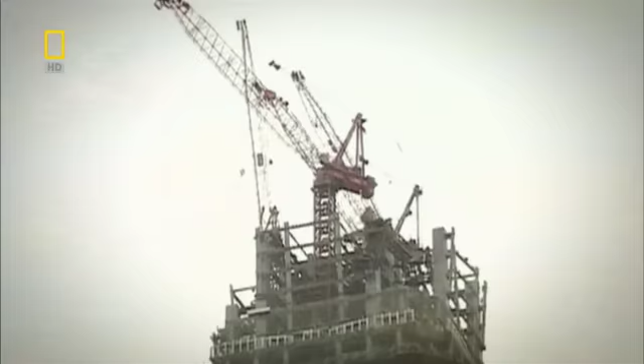This is Taipei 101, Taiwan's record-breaking skyscraper. Incredibly, it's a third taller than the Empire State Building, and cost $1.75 billion to build. But Taipei 101 not only stands in a typhoon hotspot, but right beside an active earthquake fault line. It couldn't exist without the surprising engineering connections hidden deep within its design.

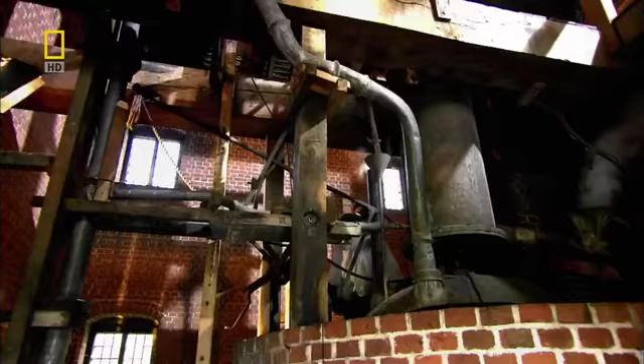A racing yacht — I can't believe the speed of this thing. A birdcage — that didn't last long at all. A steam pump. A safety belt. And a sports car.

So, what's all that got to do with one of the world's tallest buildings? We're about to find out.

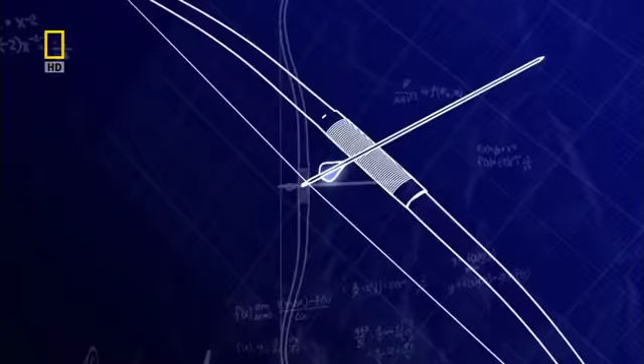I'm on a journey to explore some of the inspirations behind Taiwan's extraordinary skyscraper. In 2004, Taipei 101 topped the record books, reaching 509 meters. Everything to do with Taipei 101 is big — very, very big, whichever way you look at it.

But what made modern skyscrapers like Taipei 101 possible? Bizarrely, inspiration is thought to have come from a birdcage. Less than five generations ago, skyscrapers like these weren't possible. Engineers feared really tall wood and masonry structures would collapse under their own weight. So the question is, who thought of making buildings with metal frames, and why?

Rewind to Chicago, 1871. The city is on fire. The inferno rages for 36 hours, killing over 300 people and destroying 17,500 buildings. The ruins reveal the cause: three months of drought turned the timber buildings into tinderboxes. As a result, the city bans wood construction.

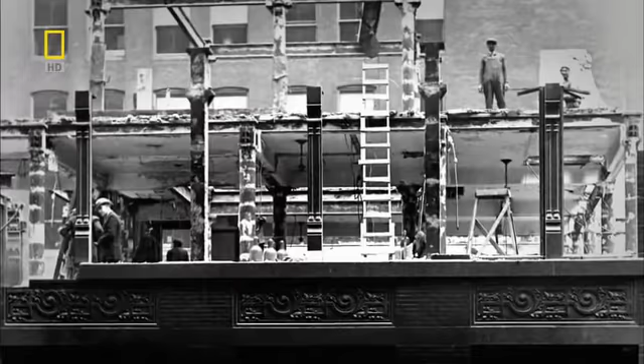Today, it may seem like any bird brain could come up with the idea of building with metal frames, but Jenney's innovation was inspired. He realized that if he bolted horizontal beams to the upright columns and transferred the dead weight of the walls to a metal framework, he'd create not only a lighter structure, but one strong enough to support multiple stories, one on top of another.

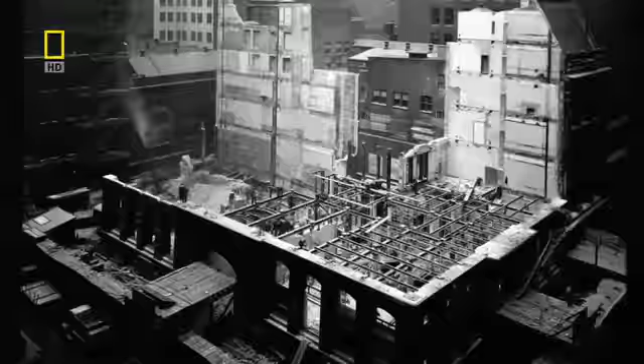I want to see for myself the kind of forces that a cage braced with beams can withstand.

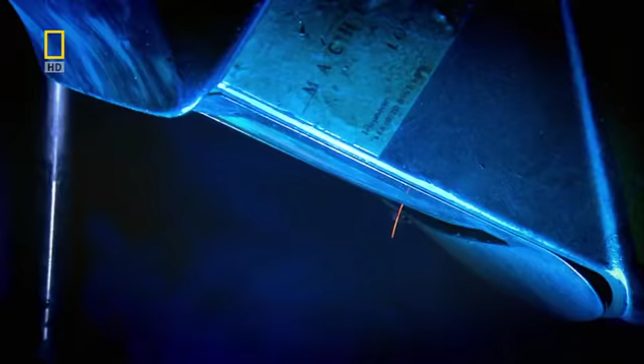So I need some cages that I could test. In order to find out just what a brainwave LeBaron Jenney's idea was, I've come to a workshop that has, amongst other things, a 25-ton crusher on hand.

Say these represent LeBaron Jenney's columns. What I want to do is see how much vertical load they can take — that's weight to you and me — first without and then with bracing.

Structural engineer Brenda Marsh has set up an experiment to find out how much downforce it'll take to crush my metal towers. So Brenda, I know this is all about bracing or beams, but how are we going to show that? How's it going to work?

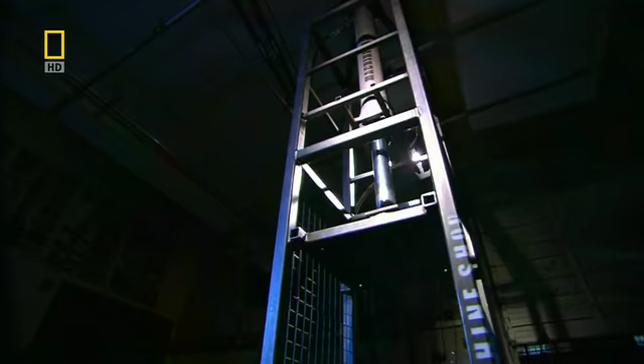What we're going to do is take this sample here that has some columns with no beams in it whatsoever, and we're gonna stick it in a press over there until it breaks.

What am I doing? You're gonna operate the machine. Okay, that's a mistake. Right, I'll do that. You better put that in the business end of it. So I need to lift the ram thing up. Apparently it's this lever.

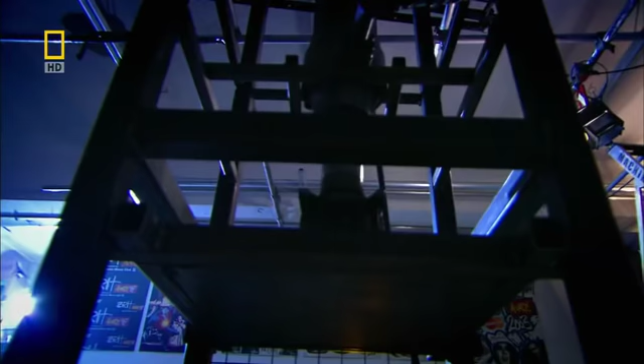Yeah, okay, now what I want you to do, Richard, is lower the plate down a little bit. Don't apply the pressure yet. There you go. Okay, stop. We need to put some safety goggles on. Oh, okay, of course we do. Make sure we're at a safe distance. That'll protect us. Right, so here comes your vertical loading. Okay, applying it now.

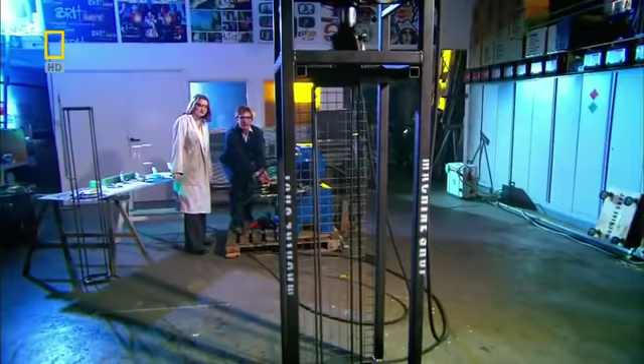The crusher can exert 23 tons of downward force, the weight of a locomotive. Yeah, oh, there we go. You can see the columns starting to buckle. The whole thing's starting to sway now. You can see — it's fantastic. Look at that. Almost immediately, the tower gives way, and that's it — it's failed. That didn't last long at all.

This is what worried the early engineers, a structure like a skyscraper collapsing under its own weight. That would be bad in a building, wouldn't it? That would be very bad. We design buildings so they don't do that.

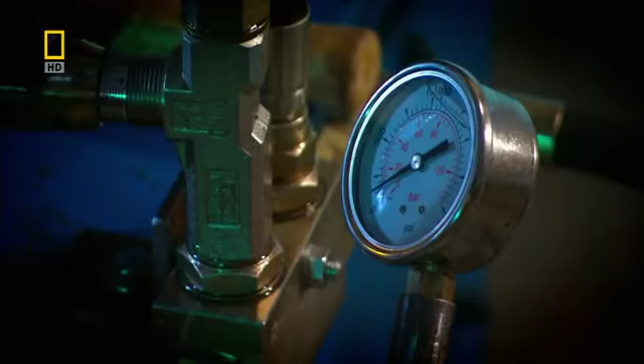Okay, we're all set to do that again with structure number 2. This is the new one. I can see it's got more bits on it, but what are the key points? What makes it so special?

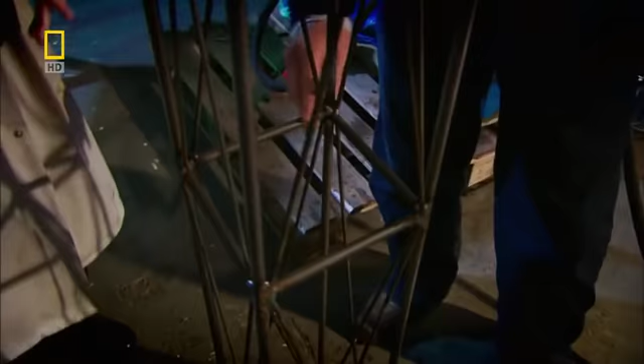What we've done on this one is we've taken what we had in the original structure, so that's these 4 columns, and we've added in some beams here. The original structure, when it failed, the columns tended to bend outward. So what we want to do is hold those in place to stiffen up the columns. So that means they're all 4 working together then, effectively, rather than bending and bowing?

Yes, we've got extra bits on as well. What we've done is, in an original building, you would have walls or something else that keep everything in place. So we're simulating that in this structure with the cross bracing. Okay, so for the purposes of this experiment, this is the important bit, these beams across here.

Can Jenny's tiny horizontal beams help the tower stand any greater downforce?

Okay, here we go. You watch the structure, I'm going to keep an eye on the gauge. All right. Straight away, that's what we were on before. 20 — that's twice what it took before.

I can hear it creaking a little bit. Okay, I'm going to increase it. The columns are still holding. Increasing it now. The crusher piles on the pressure — it's just like adding multiple stories to a tower as you build taller and taller. 25. That's going. Oh, there we go — started to buckle.

I've broken your clever one. But it did a lot better — it was 2.5 times stronger. And that's exactly what we wanted to show, that if you brace off the columns it can take a whole lot more load.

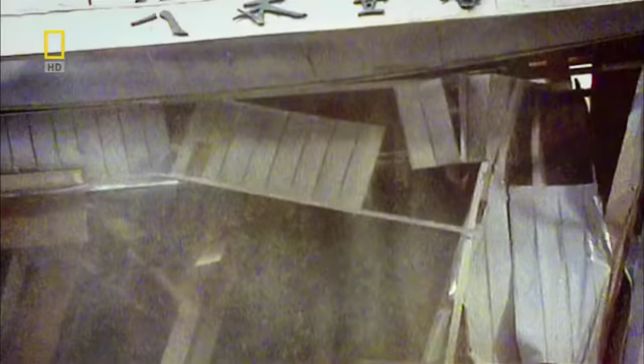Tests in earthquake simulators reveal that a building must be strong and yet flexible to avoid collapse in a quake. This is the contradiction that Taipei 101's engineers must overcome. When you build one of the tallest structures in the world in the middle of a notorious earthquake hotspot, how do you make it strong enough to stay standing, but flexible enough to withstand the potentially disastrous effects of a seismic shock?

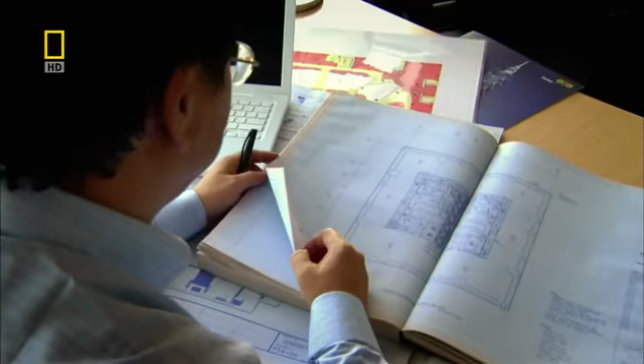The award-winning Taiwanese architect of Taipei 101, C.Y. Lee, found inspiration for his solution in nature, specifically his nation's long-standing connections with bamboo. Well, CY, what can possibly be the connection between an immense structure like Taipei 101 and bamboo? It's not made of bamboo, is it? No, it's not made of bamboo, of course, but in a lot of ways it's like bamboo. How? I think bamboo is a plant that doesn't look very strong, but it has this nature of elastic — it may bend a little bit, but it doesn't break.

Bamboo is a giant, fast-growing grass. The secret of its strength and flexibility is its internal shape. Bamboo grows in hollow, jointed sections like a series of solid-ended tubes. These are separated by partitions that help reinforce the stem.

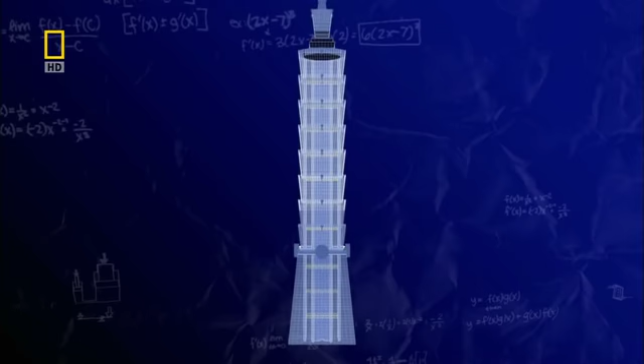Inspired by nature's solution, Lee designs giant steel trusses to connect across the columns at every 8th floor on Taipei 101. This bamboo-inspired design must meet strict seismic targets. The owners required Taipei 101 to withstand the most powerful earthquake expected to hit the city within a 2,500-year cycle.

But nature tests C.Y. Lee's design even before it's complete. In 2002, an earthquake strikes. Shockwaves tear across the island. Taipei 101 shakes violently. Anything not firmly attached crashes to the streets below.

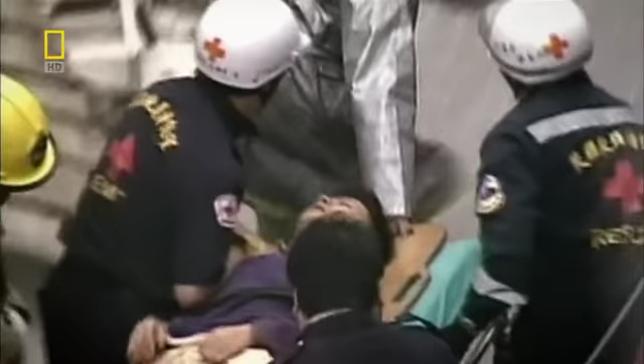Dislodged construction cranes tragically take 5 lives. But Taipei 101 stands firm and construction resumes. 2 years later, the completed megatower is crowned the world's tallest building.

But by designing a structure to withstand quakes, Wang creates a new challenge. Tall buildings sway in high winds and even risk collapse in extreme storms. And Taipei 101 is no exception. In fact, it's not just windy, it's smack bang in the middle of a typhoon hotspot.

Typhoons, Asian hurricanes, can batter Taiwan 3 or 4 times a year. In 2007, 160-kilometer winds kill 9 and cause $100 million of destruction. To keep Taipei 101 standing in a superstorm, C.P. Wang turns to an engineering solution developed 3,500 years ago.

To discover this ancient engineering secret, I'm meeting Ken Maschke from the company that helped design Taipei 101. Ken wants me to try sailing, but not in an ordinary sailboat.

Ken. Hey, Richard. Hi, how are you doing? Come on board.

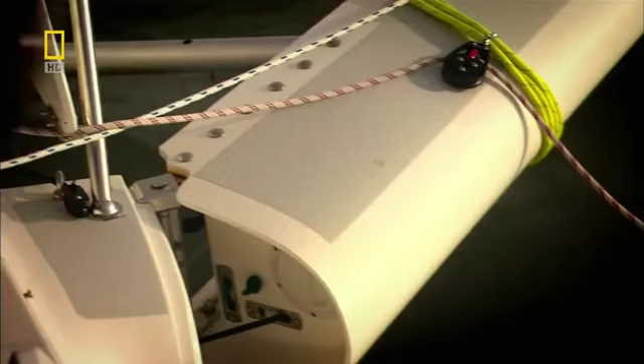This extra hull, one of two, is the engineering connection this craft shares with Taipei 101, and why Ken's got me on a sailboat. Now it's got me working. These clever devices are called outriggers. There it goes. They keep a sailboat stable in high winds. Look at that.

Before we hoist sail, Ken explains the basic principle of the outriggers. If you stand with your feet together and I shove on you, you're likely to fall over. If you spread your legs, it's going to be a lot tougher. Now, the same thing, in essence, is what we've done here. We spread out the distance between which the force acts.

The idea of outriggers goes back 3,500 years to the Polynesians. Using them meant the early mariners could paddle or sail fast and stay stable. I just hope these outriggers work as well for me today. Looks a bit cold in there.

With sails up and stabilizers out, it's time to see if we can push Ken's theory to the limit. I can't believe the speed of this thing. Today, using outriggers like these, yachts can sail across the Atlantic in just 4 days. Can this go over? Yeah. Would you mind awfully if it didn't? When it works, it really works.

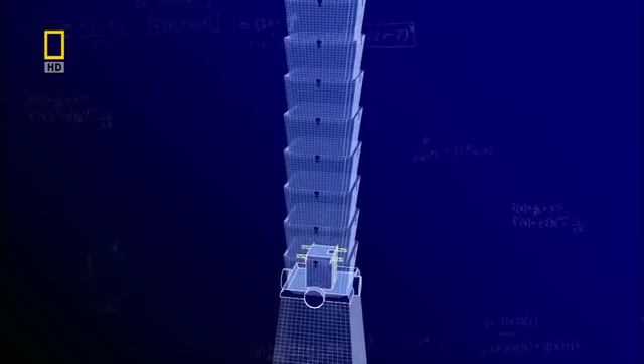I can see how these outriggers work on a boat, but the same theory on a building. How? The outriggers are part of the wind-resisting system, which includes a central core that's very stiff, but not stiff enough by itself. So we add these outrigger trusses to transfer force out to the exterior columns, like the pontoon that you're standing on right now. We can take the outrigger idea and apply it all the way up the building. So actually in Taipei 101, we have outriggers every 8 floors.

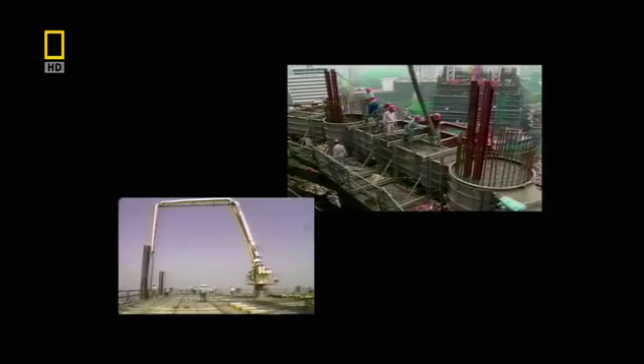With a building as big as Taipei 101, every structural challenge is supersized, especially when working with the construction world's favorite material, concrete. Every floor on Taipei 101, including the 101st, is concrete. To pump concrete that high requires a super pump that has its origins in the 18th century.

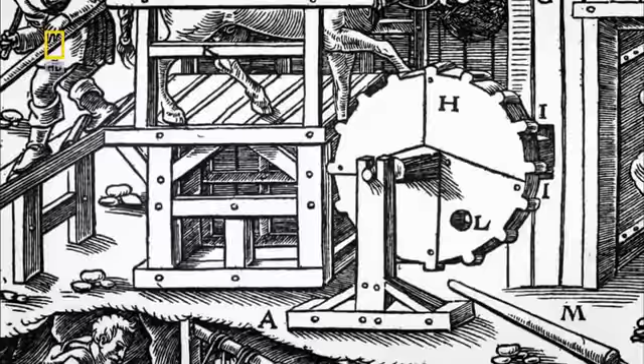Rewind 300 years. The English mining industry is in trouble. The deep mines are flooding, and the man and horse-powered pumps available can't drain water fast enough. The mines are going under.

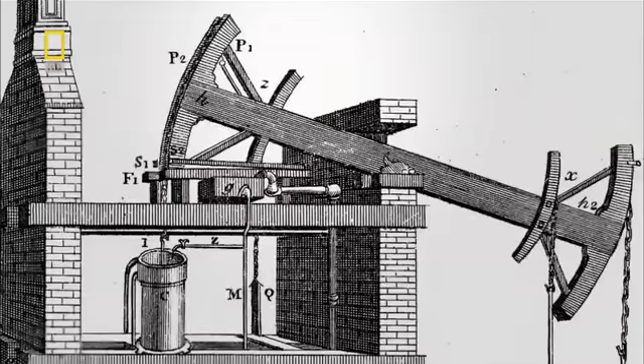Inside this modest building sits the machine that saved the day and kicked off the Industrial Revolution. It is the result of a stroke of genius from an inventive preacher and ironmonger, Thomas Newcomen. This is Newcomen's Nodding Donkey, the first piston-powered pump, and the first really practical engine for pumping water.

Newcomen's idea was to harness the power of the pressure difference created by a vacuum. He used it to move a piston. It works on the vacuum created by the steam when it's condensed.

It works on the principle that steam occupies, say, this much space, but when you cool it and turn it back to water, it occupies a fraction of that space. So this, under here is the water, the tank, and under that is the heat, heating it up in the boiler as steam up into that big cylinder, which is the piston.

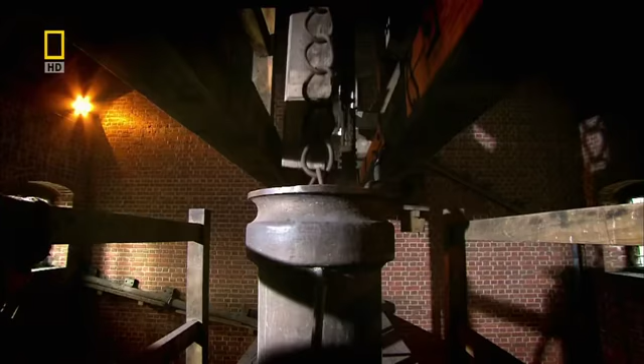That pipe goes into the bottom of the piston, sends the cold water in, that condenses the steam, and suddenly that huge volume of steam is reduced to just a tiny volume of water. Then atmospheric pressure outside on top of the piston is greater than the pressure inside, and it's got no choice. The piston has to come down, drawing the beam that way to do its work.

Then it's counterbalanced, so it just pulls the piston back up to the top. More steam in, condenses it again, draws it back down. They were very clever.

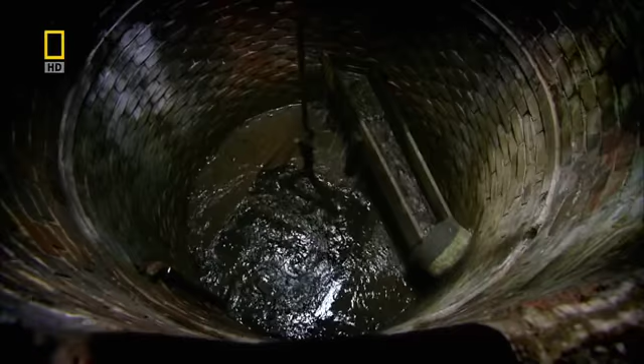Throughout the rest of the 18th century, Newcomen's invention drains countless mines, helping fuel the Industrial Revolution. 24 years after his death in 1753, the first Newcomen-style pump crosses the Atlantic to begin draining a copper mine in New Jersey.

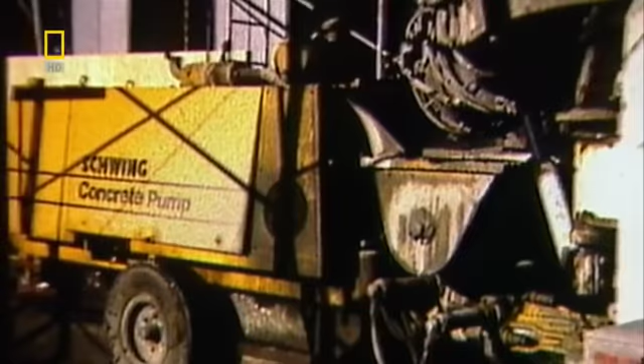Fast forward 2.5 centuries to the offspring of Newcomen's engine. These powerful piston pumps use a vacuum and mega pressures to deliver concrete skyward and into the record books.

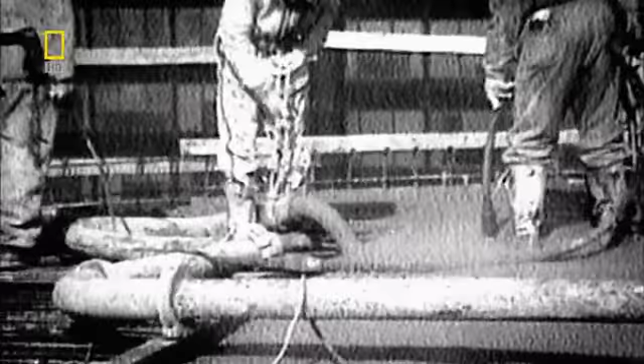In August 2003, a world record was broken, just up there. It was the highest anyone had ever pumped concrete on a building. It had to be raised 101 floors from down there. A pipe filled with concrete this high weighs well over 13 tons, and pumping it takes technology Newcomen could only dream about.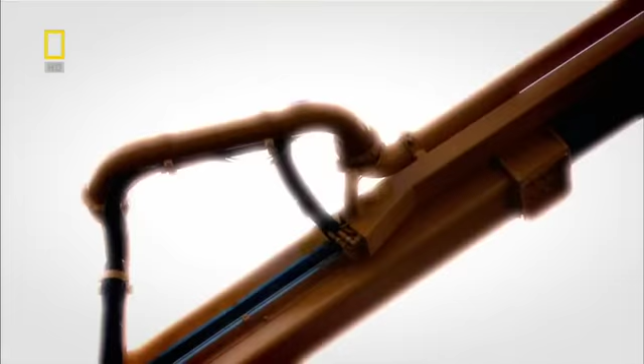Pumping concrete is big business, and as buildings get higher, the technology to power it to the top gets more sophisticated. This is the business end of a pipe network that extended over 440 metres that way. A chain of interconnected pipes stretch to reach the high floors.

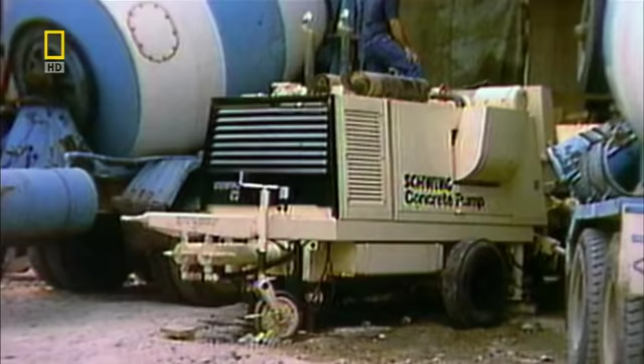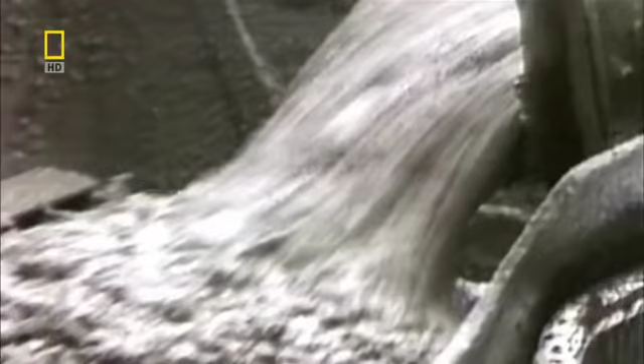On Taipei 101, the pump sits near the base of the building, and the rooftop lies 4.5 football fields above. The concrete is kept flowing by a super pump.

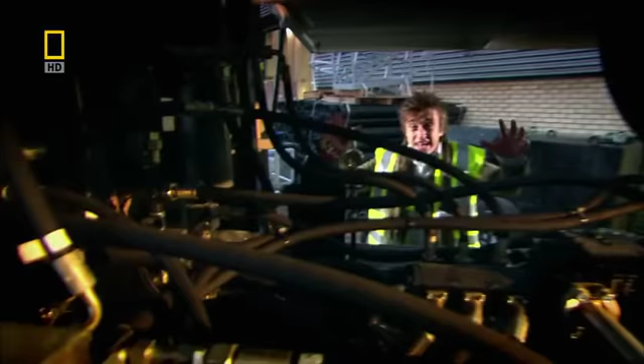Meet the 12-cylinder, 419 kilowatt Deutz diesel engine. This is the heart of the operation. Literally, it's the pump that keeps the construction alive. The moving parts in here made it possible to pump the concrete even to the highest floors.

A column of concrete must be kept flowing, or the mix will separate, or even worse, set. To keep a constant flow, the pump operates 2 pistons. One sucks while the other blows.

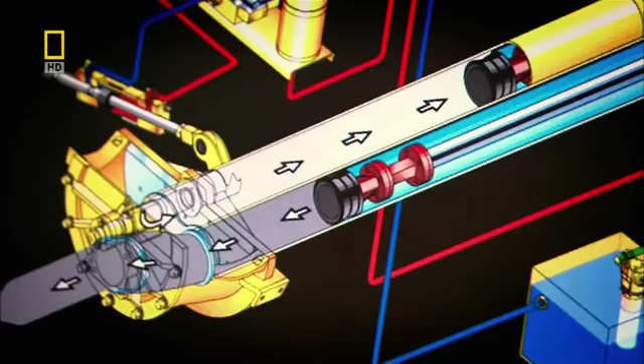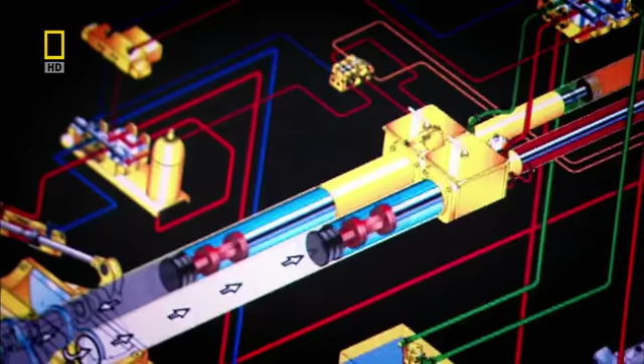A simple vacuum, like Newcomen's, pulls the liquid concrete in. Then the huge diesel engine generates hydraulic pressure to push it out. It's Newcomen's ideas, just hundreds of times more pressure for a much weightier task.

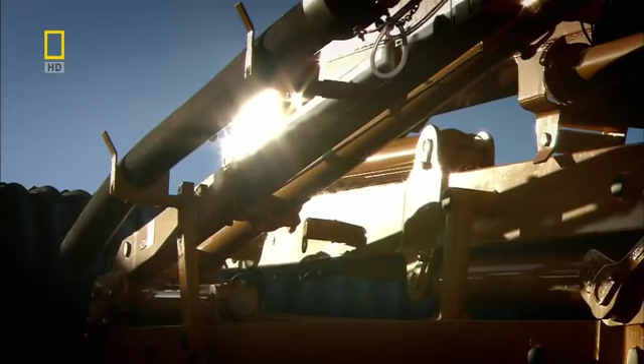I want to see what kind of pressures the Taipei 101 pumping world record used. So pump specialist Phil Suri devises a pressure demo that will blast my weight in concrete.

It's difficult to get your head around the kind of power and pressure that modern pumps can generate using those old techniques. So rather than just talk numbers about it all, we've come up with a rather clever way of demonstrating very graphically what that power can do. We're going to use pressure to move some concrete, but we're going to do it in a rather different way.

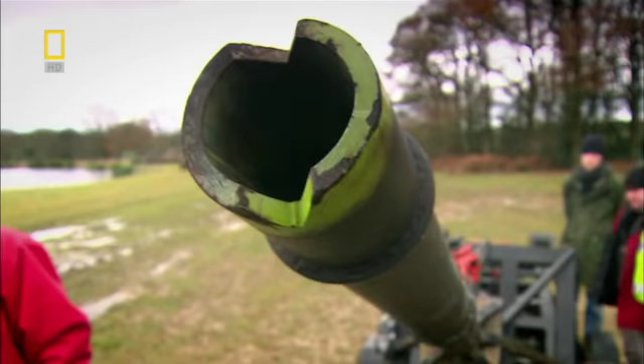Using a concrete missile as heavy as me, Phil and his team are going to demonstrate what 100 bar of pressure can do.

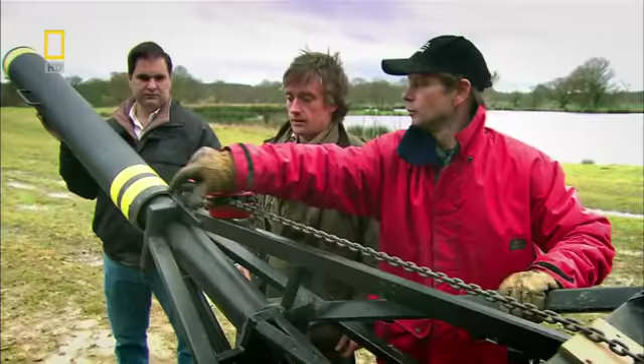1 bar, named after the Greek word for weight, is about 1 kilogram per square centimetre, or roughly the atmospheric pressure all around us. I pump my car tyres to 3 times that, 3 bar, and that seems like a lot.

It's a firing cable. Huh? That's a cable to fire it, that's a trigger. Right, that's what I said, you trip over it. Well, sorry, I'm sorry. But this will give me an idea of what?

Of what 100 bar of force is capable of doing. Taipei Tower, the pump that we used there was capable of 200 bar pumping pressure. This is only capable of 100 bar. So your pumps roughly half. Your pumps can generate twice the pressure this.

Exactly, yep. And you're just telling me that because you're proud of your pump. That's what that is. Yes, I am. Yes, you are. I am.

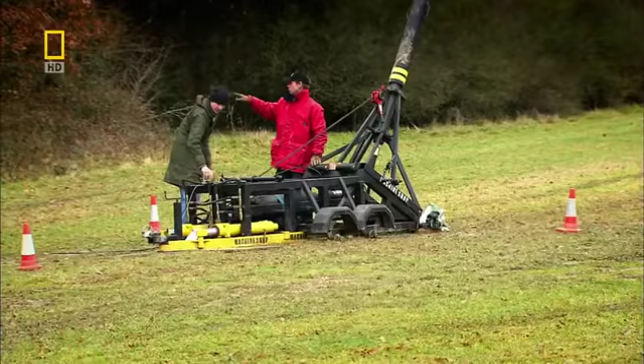This is a first for me, obviously. I've never seen a chunk of concrete my weight fired from a cannon. Phil is keen to see how far his concrete missile will go.

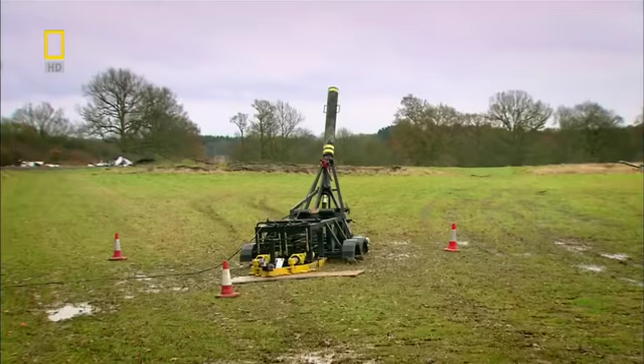The safety team are keen to make sure no one is on the receiving end. Fire.

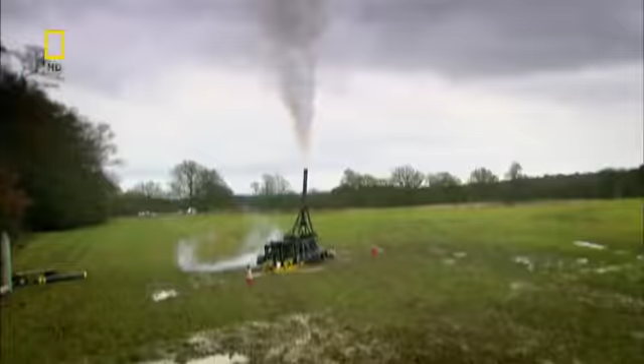Wow, so that's half the pressure on a lump of concrete the same weight as me. Yep. You're what, about 140 pounds? Yeah, 64 kilos. Okay, 10 stone. Have we got to go and get that thing? Yeah, now, let's do it. Crikey.

The launcher blasts my concrete twin well over 90 meters. The top of Taipei 101 is 4 times that distance, straight up. And the record-breaking concrete column was 220 times heavier than me.

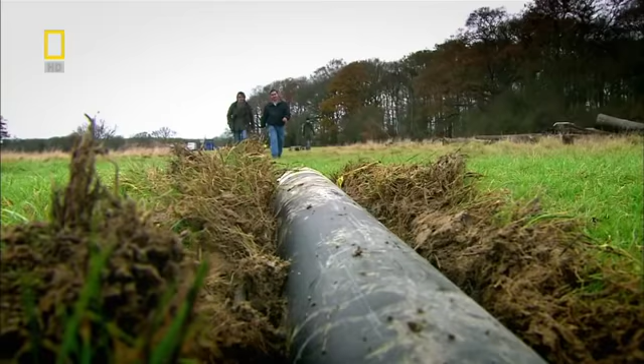I now understand the amazing pressures Phil's pumps achieve, sending concrete to the 101st floor of the Taipei Tower. It's buried itself, yeah. It's quite impressive, look at it.

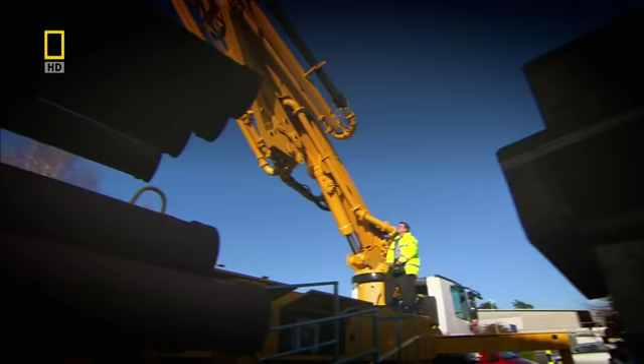The mechanical pump has come a long way from Newcomen's wheezing steam engine. That's how they got concrete to the top. But how do you transport people to such heights safely and quickly?

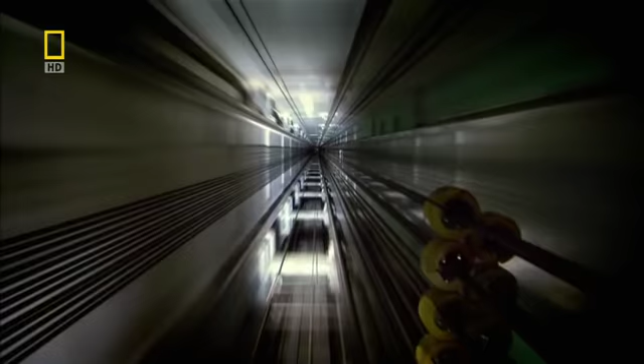Which brings me to elevators and my next connection.

Whatever type of transport you're using, including elevators, there's a problem with going faster. You've got to be able to stop faster too. Higher speeds mean more braking loads, and more loads mean more heat. So how do you provide a braking system that can work without overheating and risking a fire? And what's that got to do with a sports car?

Being big and tall like Taipei 101 means lots of elevators. In total, 67 elevators are needed to keep the 10,000 people that Taipei 101 is designed for on the move. 34 are even double-deckers.

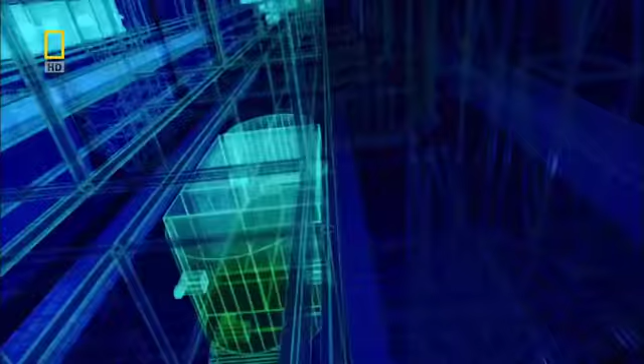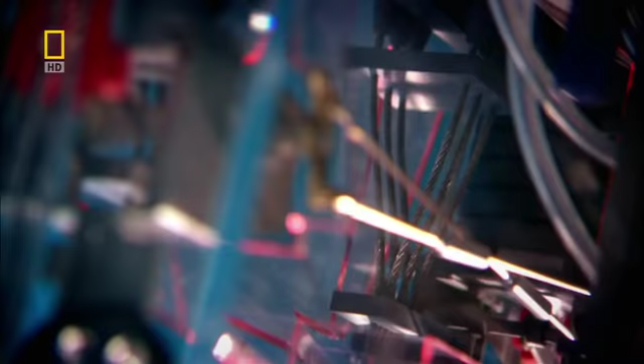But for tourists wanting a flying visit to the sky-high viewing gallery, these regular elevators aren't fast enough. The challenge is whisking a visitor like me directly to the 89th floor, super quick, but super safe. This is the answer: the world's most technologically advanced elevator.

Well, obviously this is a model. The real thing's bigger, so you can get in it.

Digitally controlled, it has a pressurized aerodynamic capsule with shake reduction and even earthquake sensing. The designers say it also goes really fast. I want to know how fast.

This elevator, one of a pair, has been officially certified by the Guinness Book of World Records as the fastest elevator in the world, and they've given it to me to play with. So, they reckon it can do the next 84 floors in 37 seconds.

Ellie, when you're ready, if you would, thank you. In your own time, go. As soon as we start moving, I'll start the clock. Go. I think we've started moving. There's no noise. There's a fan.

Apparently the whole lift is pressurized like an aircraft to help stop your ears from popping. Talking of aircraft, this actually accelerates vertically more rapidly than a commercial passenger airliner taking off. And my ears are now popping.

Right, we're 20 seconds in, 25. There's no sense that we're going faster than the city speed limit. We're breaking the speed limit. If we did this horizontally through the streets, we'd be in trouble. There's no noise. And that's it, and that was under 37 seconds, and this is the top.

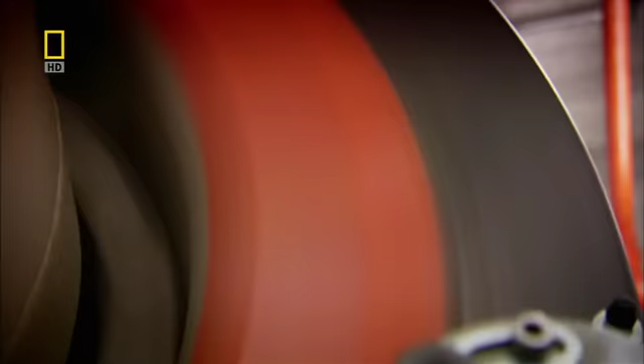If the elevator cables give way, it's an 84-floor drop with only the emergency brakes between you and the basement. In extreme events like this, metal brakes overheat and can fail. To hold Taipei 101's super elevators, the engineers needed a material that performs consistently even when things get seriously hot. It's an engineering line of thought that owes a lot to the automotive industry.

This is a high-performance Porsche Boxster S and my next connection.

Porsche was one of the first car companies to experiment with alternatives to metal brake discs. The material that performed consistently at extreme temperatures was ceramic. Their tests report the ceramic disc brakes don't get as hot as metal and can even grip better the hotter they get. I want to check out the difference in performance between metal and ceramic brake discs for myself.

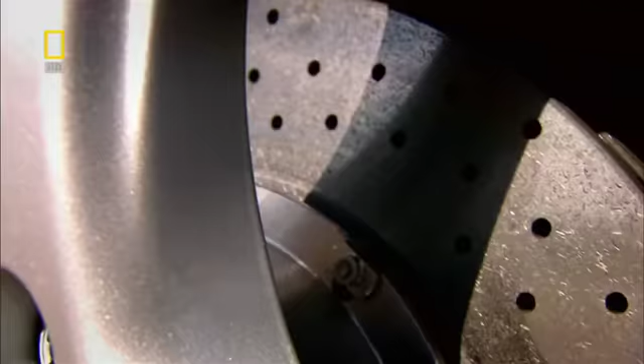So I'm meeting Craig Dawson, a motorsport engineering expert. So, Craig, what are you doing? Well, basically, I'm trying to get a benchmark for both the disc temperatures at the moment on the two cars.

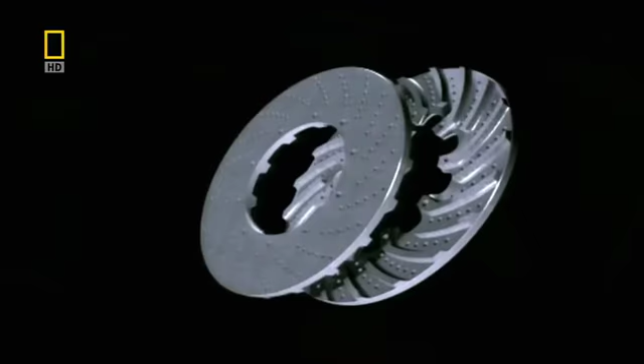These two cars are completely identical in every way, apart from the brakes. The yellow car has a traditional cast iron disc, like every modern day road car. The red car has what is known as a ceramic disc. The ceramic compound that makes up these brake discs is usually silicon carbide or silicon nitride, baked at extremely high temperatures to form a heat-resistant material.

Why is heat such an issue in brake discs? Well, with a cast iron disc, it can get to the point where it gets too hot. It begins to not work as well. The friction that it actually produces goes down, so the pads can't grip as well on the disc and it doesn't work as well.

And there's double trouble when metal brakes overheat. Not only do they stop gripping as well, but if they fail to dissipate the heat, they can set fire to what's around them, as this very extreme example from the world of motor racing shows. We have flames! Not good for emergency brakes in an out-of-control elevator.

Almost the opposite applies with the ceramic brakes. It needs heat to get them to work in the first place, but they can go to a higher temperature as well. So how are we, with just these two cars, going to show all of that?

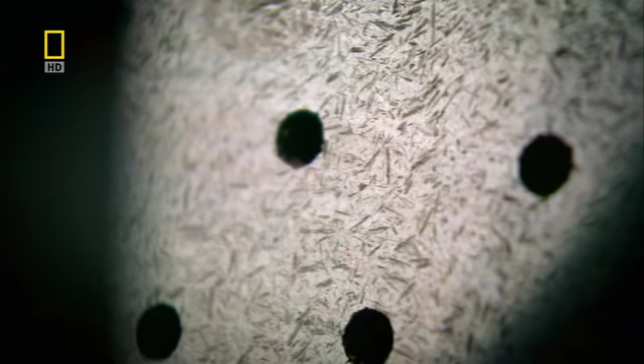Well, basically, you're going to perform a series of repeated stops, which are going to build the brake temperature up. Here I go. 5 laps. The first test: drive very fast, then hard on the brakes 20 times over 5 laps. Reckon I can manage that.

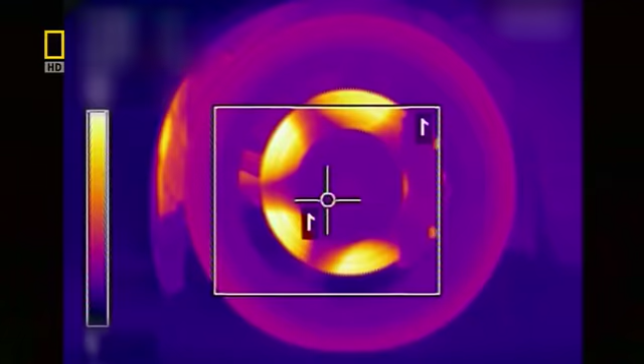The idea is to build up the brake temperature so I can feel if their performance changes as the heat increases. To gauge the temperature, we're using a camera that turns heat into visible light. The reds are hotter than the blue colours. White means it's getting serious.

Craig also wants to see how quickly they lose their heat. A lack of heat loss is what can build catastrophic temperatures in metal discs. I can smell brakes. I don't know if that's good scientifically.

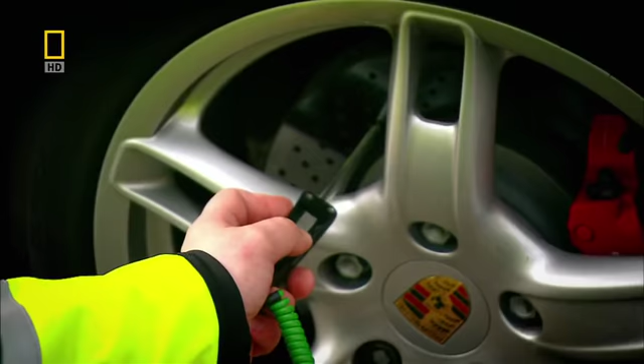627. Okay. When I pull in, Craig immediately checks the surface temperature of each brake disc. The readings on the front discs are well over 300 degrees centigrade. They're still functional, but as hot as the inside of a jet engine.

290. Craig will take a further series of readings to check the rate of cooling. Thinking back, the brakes did begin to feel different once they'd got very hot, but still perfectly safe.

Now it's time to take the ceramics for a spin. How will they perform?

To begin with, everything seemed the same. The ceramics get white hot on the heat camera with my multiple braking. But then I notice a difference. The brakes feel really sharp each time I use them, even as they heat up. Every brake is as good as the first.

When I pull in, Craig gets an immediate result. 31. His first temperature reading on the ceramics is lower than the metal. They stayed cooler. And did you notice any difference in the actual braking performance itself? Yeah, they clearly weren't being as affected by the heat that was being put into them, and it felt fresh each time I braked again. So every time it felt more consistent, basically? Yeah, exactly.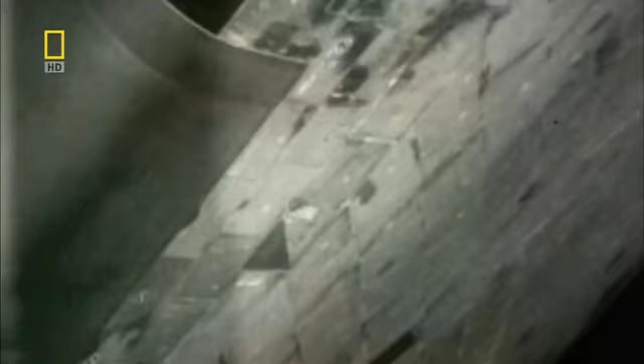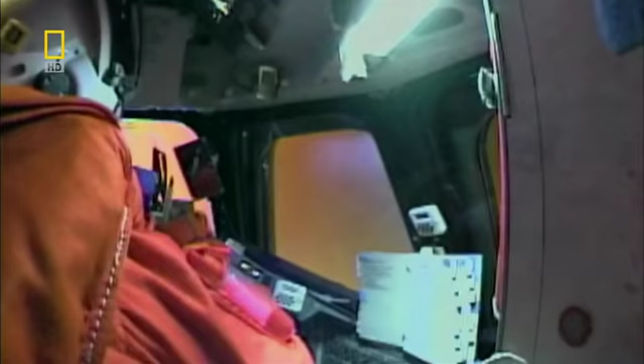Using a compound based on sand, aerospace engineers at Lockheed Martin develop a new silica ceramic insulation. This forms the basis of the shuttle's heat tiles. A ceramic tile can heat to over 648 degrees centigrade on one side and stay cool enough to touch on the other. In really extreme situations, the tiles can withstand temperatures of over 1600 degrees centigrade. That's hot enough to melt rock.

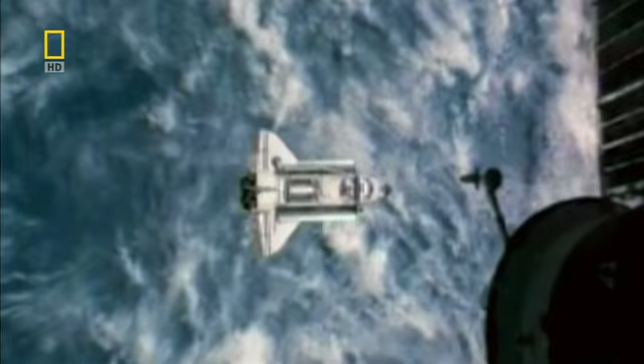Heat-resistant ceramics are now well and truly proven, with their origins in rocket science and a track record in performance car brakes. On Taipei 101, they are the engineer's choice for brakes to halt a runaway high-speed elevator.

This is mission control for Taipei 101, where they monitor everything and everyone. One full section just monitors all the elevators, including the state-of-the-art ceramic emergency brakes. Should the cables snap on the high-speed elevator, the emergency brakes will activate.

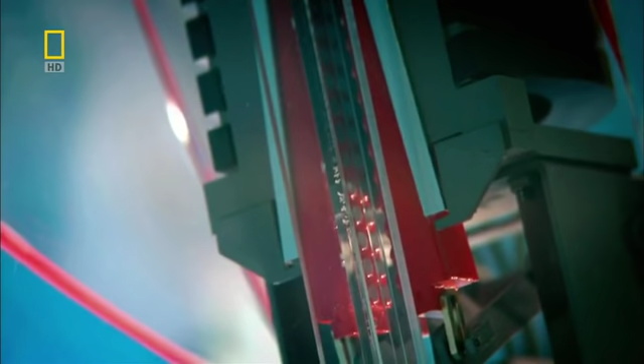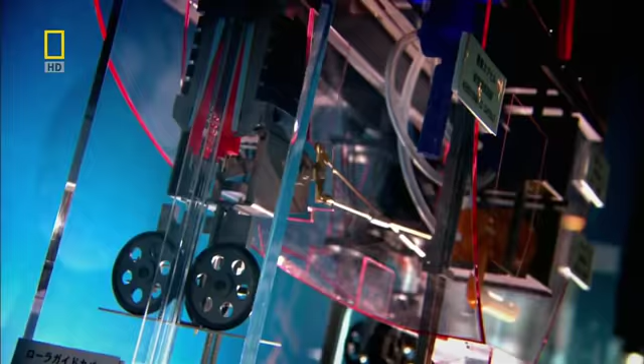Two silicon nitride ceramic pads will grip a steel safety runner. The pads will withstand almost 1000 degrees centigrade. That's as hot as molten lava. The elevator brakes will hold 22 tons, speeding at 76.5 kilometers within 40 meters, less than half a football field, thanks to ceramics. And that's what connects a sports car with stopping the fastest elevators in the world.

But for me, the most surprising thing about Taipei 101 connects your car's seatbelts with stopping diners up on the 85th floor spilling their soup when the high winds hit.

The threat of tropical storms hangs over Taipei 101. It's not fear of collapse, but a delicate issue of customer comfort. The typhoons that blast through the city of Taipei mean driving rain and 160 km/h winds slam against Taipei 101, and it feels it. You see, a tall building like this is prone to bend in the wind.

Remember the bamboo, flexibility and all that. Now, some flexibility in a tall building is a good thing. That is difficult to avoid. But too much, and it can give the people inside it motion sickness.

When I asked the engineers what a typhoon might feel like in a tall building, they said, try eating soup on a bus. So I did.

Before Taipei 101 was built, it had to overcome the problem all flexible buildings face: swaying back and forth in high winds. And like any structure, it has a natural frequency. In this case, one complete cycle of swaying motion from here to here and back again takes about 7 seconds. For customers in the restaurant, that would be like sitting on board a bus that every 3.5 seconds accelerates and then brakes. And that's the delicate problem I'm talking about.

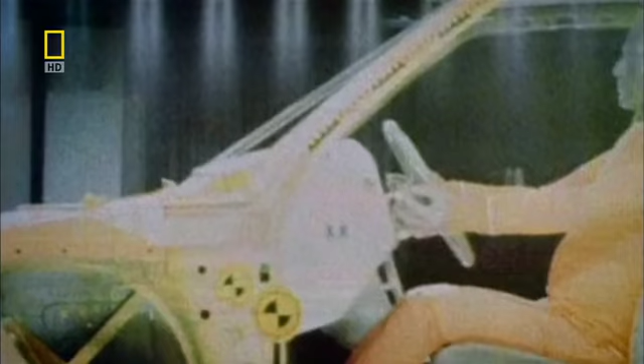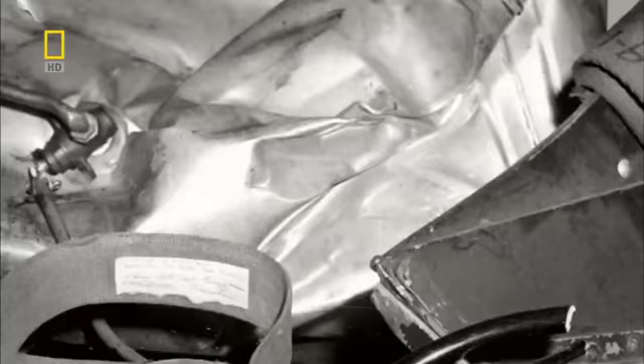Back in the 1950s, a researcher at Cornell University encountered the destructive side of inertia. His name was Hugh de Haven. After surviving a serious air crash, de Haven was motivated to study collisions.

As surprising as it may sound today, back then the common belief was that you were better off being thrown free in a car crash. De Haven realized the damage was done as passengers fly loose and impact their surroundings, and that inertia was the culprit. But restraining them would protect them.

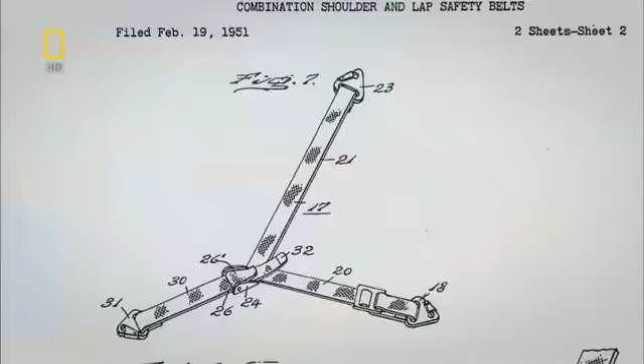In 1951, Hugh de Haven files a patent for the 3-point seatbelt, and car passenger safety leaps forwards. Two decades later, the inertia reel safety belt is introduced, initially by Volvo and Ford. It leaves you free to move around, only locking under sudden movements. It uses the very same property of inertia that Hugh de Haven realized caused injury.

Inside an inertia seatbelt sits a heavy steel ball. When a car is in a collision, the inertia of the ball means it will move independently. The moving ball hits an arm that pushes up and triggers a process that locks the belt.

Inertia is also harnessed in the giant 600-ton steel ball suspended at the top of Taipei 101. When the building sways, it swings like a giant pendulum, then pushes against oil-filled shock absorbers, or dampers, that dissipate the sway.

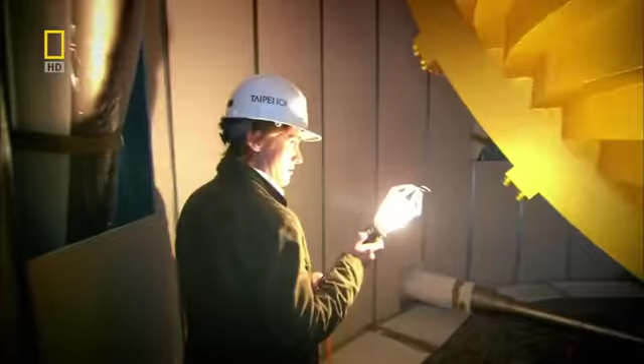I want to check out the damper for myself, so I have permission to go into a construction area underneath it. It feels a bit like caving, except I'm in a tunnel over 80 stories up. Wow! Here it is, the heart of it—6 meters in diameter and made up of 41 separate steel plates. Only now do I get a sense of what a radical and inspired idea it is.

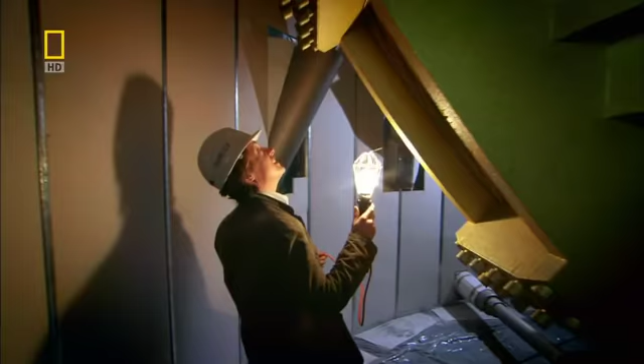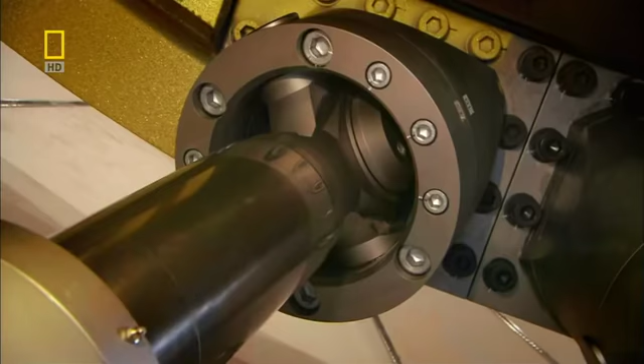Suddenly, now I see it, I understand much better how it works. This massive ball, this weight, sits here in the middle of the building, and as the building starts to move, at first the ball resists that movement. Then it starts to move, but that's where these come into play—they're kind of like the shock absorbers on your car, only massive. And as the ball moves, these absorb the energy, they soak it up.

And all of this is happening—hundreds of tons of steel swinging about, 80, 90 stories up.

C.P. Wang, the architect of Taipei 101, has his own demo of the damper at work. So I went to meet him at the top of his award-winning building.

When wind hits, the building really moves. And it starts doing all that for a long time. It makes people uncomfortable working in the building. So what we have designed is this. If you would please take that down. Okay. And this is more... replace this with this. Yeah, the purpose—this has got a ball in it. This is our damper, actually the heart of the building.

Wang explains his metal ball in this demonstration is in an oil-filled tube. This best represents the oil-filled shock absorbers attached to the giant damper. So I'll mount that in. So this is now with your damper in. Now the wind is blowing again, and... Wow. So it doesn't stop it moving, but once it started moving, it takes the violence out of the movement. It doesn't accelerate or slow down as quickly. It's a more gentle feeling.

I suppose what it's doing is giving you a better ride up here, isn't it? Buildings are for people to use, so if we cannot make the people comfortable, we don't have a good building.

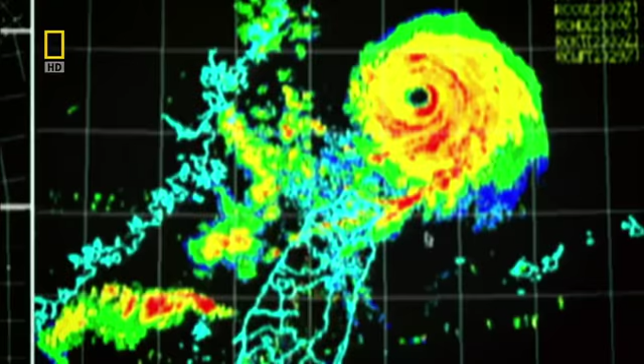On the 3rd of October 2005, Typhoon Long Wang blasts hurricane-force winds across Taiwan and presents the damper system with its first serious test. This film shows the ball in action as the 110 km/h winds blow that day. As it begins to swing, the giant oil-filled cylinders take up the energy from 660 tons of swinging steel.

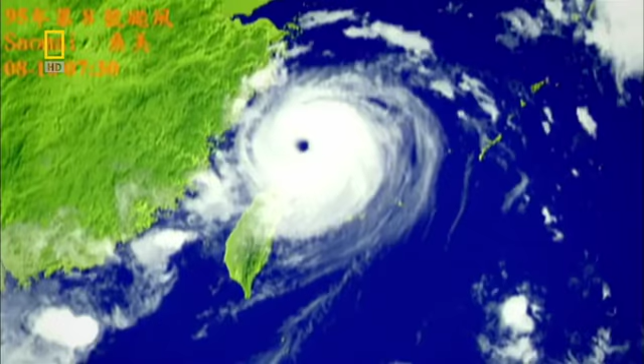This extraordinary footage, filmed on a cell phone, reveals the ball damping 545,000 tons of skyscraper as she sways in the typhoon. After 3 hours, the winds abate, leaving Taipei 101 to face another day.

So, thanks to scientists from the past understanding inertia, today anyone can enjoy soup in a storm at the top of one of the world's tallest buildings. Looking down, watching the bustle of daily life on Taipei's city streets, it's hard to comprehend the incredible feats of design and engineering that went into making this extraordinary tower possible.

Taipei 101 reaches skyward thanks to a birdcage. It's built to beat earthquake and typhoon with inspiration from bamboo and ancient outriggers. It uses Industrial Revolution-style piston power for world record concrete pumping. It calls on high-tech ceramics to stop the world's fastest elevators. And is inspired by the inertia seatbelt to have storm-beating stability. Taipei 101's exceptional engineering connections mean Taiwan's record-breaking tower is one of the modern world's most spectacular construction icons.

From down here, there's just no getting away from the size, the sheer presence of Taipei 101.

Now, where's my moped? There was a grey one like that, but not—no, that's, oh, excuse me, is that—no, that's not mine. Why didn't I get a yellow one I could spot?